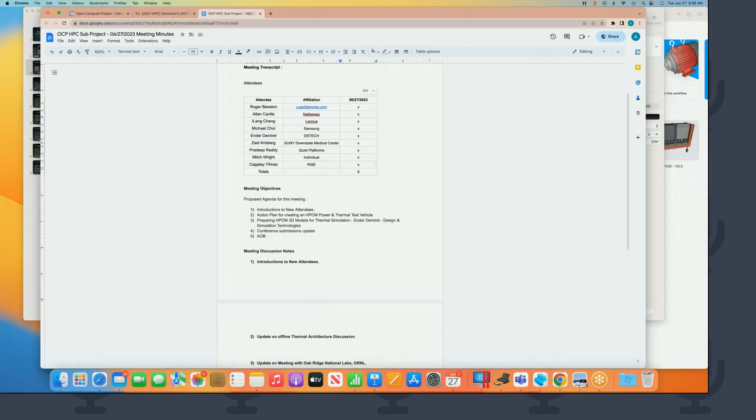So what I've got for today is, I believe we have a new attendee, so we'll have a quick introduction in a moment. Then I've started to put together a little bit of an action plan for actually creating an HPCM power and thermal test vehicle, but that will also help us go in the direction of creating a real HPCM module. So I'll get into the detail of that.

Then I've been working with Ender from DSTECH and Cagatay from RISE with regards to some thermal simulations. Ender's been starting that effort, and he has some things to talk through in terms of what he needs for the thermal model to get that going. So we'll cover that part of it, and then hopefully we can move the ball forward on his simulations.

And then with regards to the conference submissions, I have given an update. I have submitted something to the OCP main program, just to give people an update on what we're up to. I would also like to talk about a few other topics on a few other conferences that are coming up, and whether we should put something together for those.

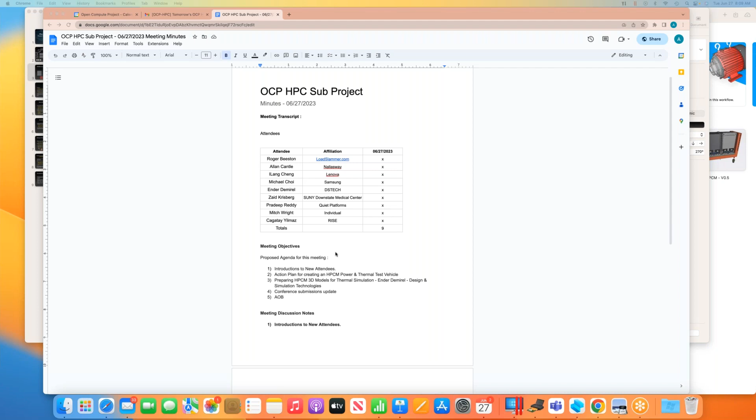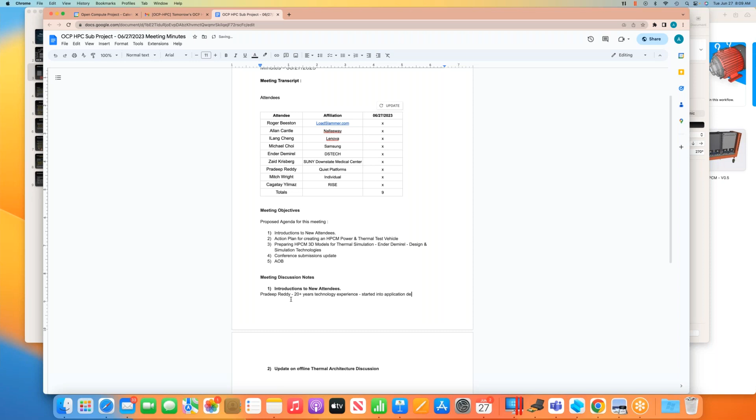Yeah, sure. Thanks, Allan. Hi, everyone. My name is Pradeep. I have around 20 plus years of technology experience, and I started into application development side, Java and open source. Later I worked with multi-cloud platforms and also on-premises infrastructure during my career. I've also worked as a startup entrepreneur two times, and I have my own company.

And also I'm an angel investor in a couple of startups and advisor mentor to them. And recently I was working with Quiet Platforms, part of American Eagle, as a director of cloud infra engineering. I'm based out of Bangalore, India. Thank you.

Thanks, and Alex, would you give us a quick introduction please? Sure, my name is Alex Lovell-Troy. I'm with Los Alamos National Laboratory. My background in HPC is through Cray and HPE, always on the software side, so HPC system management, those kinds of things. My interest is in figuring out what the future of system management looks like, given the changing form factors and things like that, so I'm particularly interested in that area.

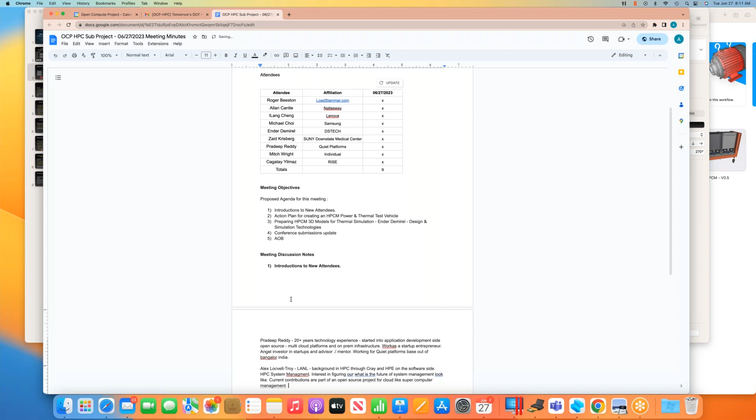Excellent, Alex, I didn't realize that detail about you. That's very good, that's a big aspect that we need to work on. I've had some past experience - in fact IBM have done a lot of donation into the industry on that area, and I think that's a big area where we could make a big difference here as well in a sort of collaborative way. So your help on that front would be superb.

I think that is the key, one of the key software areas. We're focused very heavily on the hardware, but the software side of the system management is going to be a rapidly changing area in my mind. I'm not sure if you're familiar with OCP's CMS, the composable memory system work group, but CXL fabric management is one of their big topics, and you can see that there's a lot of work to be done there of how do you enumerate the machine and discover all the different pieces of memory that are all over the place and bring that all together. So that's a big management challenge.

Yeah, totally. As we move to a more decentralized supercomputer, how do I know that the memory I'm talking to is the memory I want to be talking to - that's the problem, right, and not some sort of rogue piece of hardware, that's a big deal. Okay, no, absolutely, oh that's great.

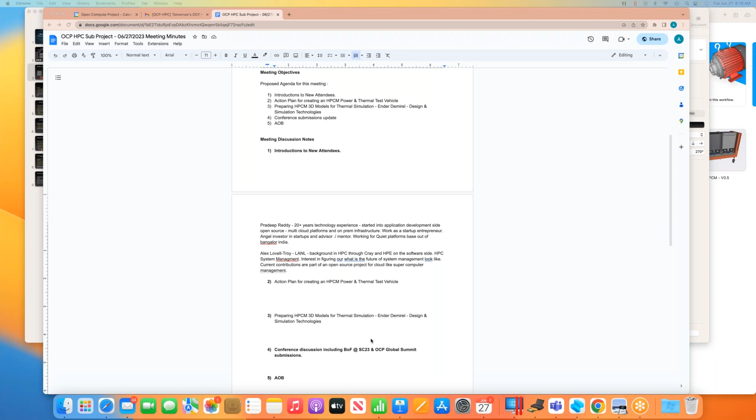Okay, so I've pulled together some slides. Let me just go to the beginning of these slides. Hopefully you can see this - can you? Yeah. So I've titled this 'Plan for OCP HPCM Power and Thermal Test Vehicle.'

What I wanted to start with here is we actually came up with the architecture of this Versal Premium module probably well over a year ago now. The nice thing about this particular FPGA or ACAP device is it does have a decent number of transceivers, 168 transceivers, so that we can fully connect, or not fully connect, but get a decent amount of connections into this first HPCM module.

We have been talking, for those of you that are aware, to XConn Tech about potentially doing a CXL switch version as well. Obviously the FPGA is a Swiss Army knife, and people are using it for a lot of CXL enablement, because that's one of the key areas where we see if we can get maybe some attention.

We've also been talking to Enfabrica about the potential - they've got an interesting switch chip that has both CXL IO on it. They see a shared memory model where you have the memory in the middle that can be shared locally with accelerators and processors, and also shared over an Ethernet fabric with a bit of a slingshot-like protocol. They've got their own proprietary low latency over Ethernet approach for shared memory. I'm hoping still to get them to present what they're doing, which would be helpful.

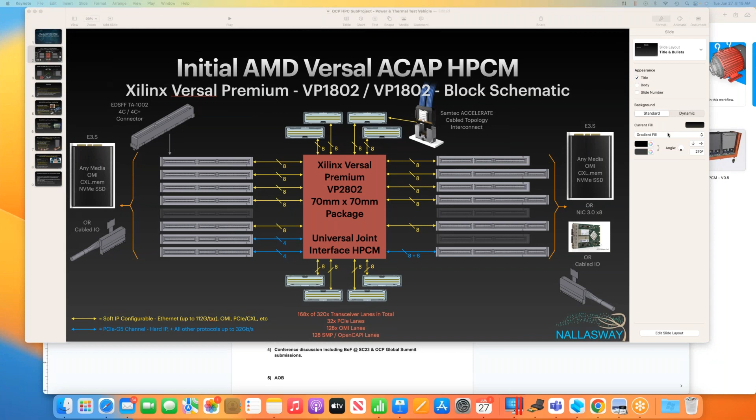Okay, but we've decided I think it's prudent for us to move forward with an FPGA based one first. There's a lot of things we can do with this, and it's being heavily used for a lot of the CXL developments, because you can do it in the soft IP.

So again, this is just showing the block diagram at the logical level. I wanted to add that I'll get these animations - we can plug all these different modules into these slots. Sorry, this is an old slide, I should have turned off the animation. But we can plug cables or modules into here, obviously.

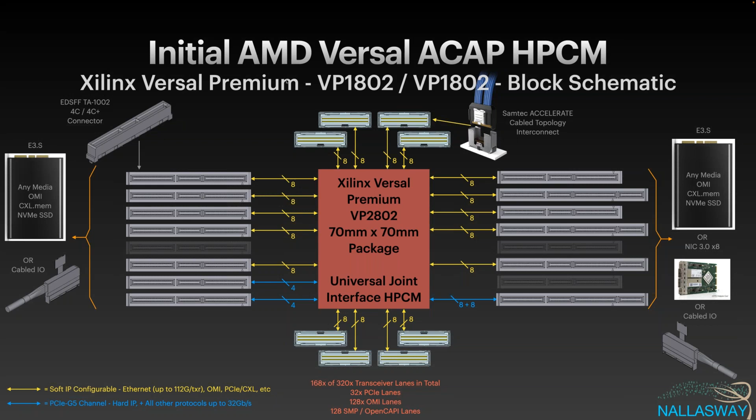The other piece of this, tying into Alex's introduction, is quite specific. In OCP we have this DCSCM, a secure control module that manages everything from a root of trust perspective. But we want standalone boot capability of all these devices, as we move towards this distributed computing world. We don't know how these things will be configured at power on, so they need to be able to self-boot and then be discoverable, so we need some level of BMC in the actual infrastructure.

As well as that, all of these modules we're supporting in this standard do have some level of sidebands. There's a big debate at the moment about whether CXL should have physical sidebands, out of band over the transceivers, or in band, or all three - that's a moving feast. But we know that NVMe modules, CXL.mem modules, and all of this, at the moment do have traditional sidebands. So we need to absolutely support this.

One of the nice things is Lattice has been doing a lot of work on the I2C and I3C front in terms of aggregating a lot of these sideband signals over a single wire aggregator. They also have something called LVDS tunneling protocol interface, LTPI, which they've freely donated to OCP as part of those efforts. That helps routability on the boards since there are lots of pins on each of these connectors. You can see these ICE40s in this picture - they're collecting a bunch of sidebands from two of the IOs and aggregating them down to a single wire to pass back to the BMC controller.

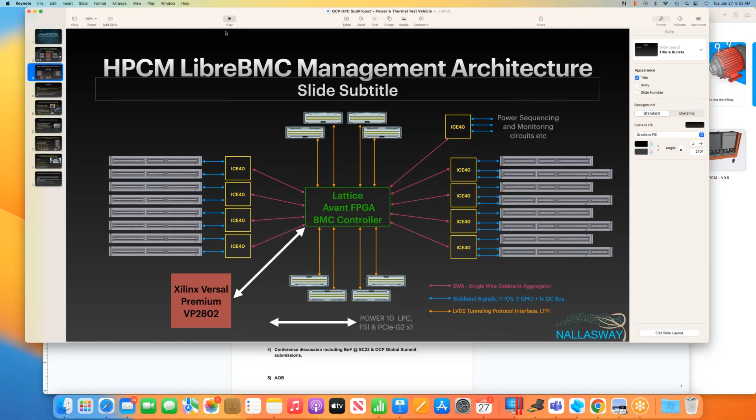Okay, yes, so we've got that. These are tiny devices as well, so they can be mapped - we've already got them mapped on the boards, but in the middle we need this BMC controller.

Now, one of the big efforts about making BMCs - they're a big area of potential hacking - and whilst we've got OpenBMC that has really gained tons of traction, on the controller side they've been dominated by a couple of smaller companies whose hardware IP is very proprietary. So there's been an effort called LibreBMC, which IBM were heavily involved in, along with a number of other companies, and OCP as well.

I believe LibreBMC is actually implemented on the DCSCM, the security module OCP have created. There are two variants, one with a Xilinx FPGA and one with a Lattice FPGA, I believe. The idea is you can implement fully open source software controllers, as well as all the low-level hardware features for various monitoring functions, and it can be fully visible and open source to everybody. So LibreBMC is that hardware effort.

So with Lattice's support, we're moving forward with a Lattice implementation on the module here. You can see the ICE40s, which are Lattice devices, doing this aggregation to bring all of this sideband IO in. We're using the LVDS tunneling potentially across some of these other interconnects for the topology interconnect if you want to carry them as a sideband. So that's basically the layout of the module at a very high level - that's the core of the logic. Obviously, the other piece of the module is the power.

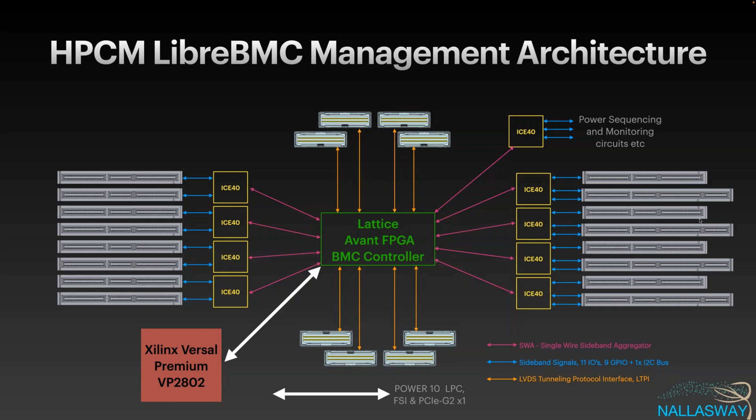So that's the module we're starting with. But we don't want to get too far ahead of our skis in that module design until we know we've got a good thermal and power infrastructure. That's been evolving quite rapidly, and OCP and these efforts have been driving the power industry quite nicely. We've made quite a good bit of progress in the last year compared to the last time we analyzed the power situation, when you want to deliver 1,000 watts plus.

So the objective of where I'd like us to go next is we want to prototype one of these HPCMs, but we've got this radical power and thermal infrastructure architecture. So we want to really build some prototypes and test this out, as well as simulate it.

So to do that, we'd need to build an HPCM load power test module. And we'd also need to build an E3.S load power test module so we can show that we can successfully cool these media modules as well. In that, we want to emulate the distributed power across the module because we've got some conductive cooling going on there that we need to analyze.

Once we've got those two modules, alongside that, we're going to need to design and build the HPCM, the main processor water cooling prototypes. I think we've got a couple of options for cooling the main HPCM, the kilowatt processor. And we have to design and build an E3.S conductive water cooling prototype as well. So then we need to test it all.

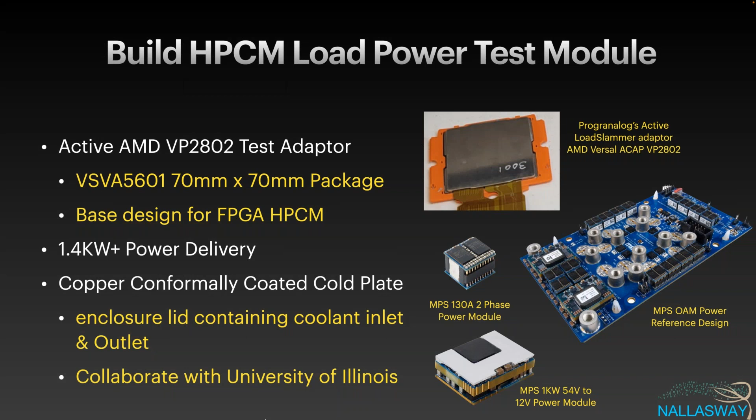Good question, let me just switch back over to the model if I can. Is the model going to be... I just want, for people that are new to the call, I wanted them to see this. This is going to take a bit of time to load, but essentially it's the same. So we need to build a prototype of the wall. We've got this wall infrastructure which provides the cooling. We were cooling in a vertical column of 16 HPCMs, and I showed a pumped infrastructure with control.

And what Greg is talking about is the potential to turn that into a thermosiphon approach instead. So at this point, Greg, I'd say no, we're just looking at an individual module. I'm thinking of maybe we implement a radiator type to cool a single module where we can pump the water around. Maybe we actually leverage some of the very low cost water cooling solutions from all these third-party companies for gaming PCs.

This prototyping level, it's all about making the blind mate connectors and making all of this work, but doing it from just from a get this up and running. Can we cool this? And if we can control the flow of the water, we can also do a little control loop on a single module.

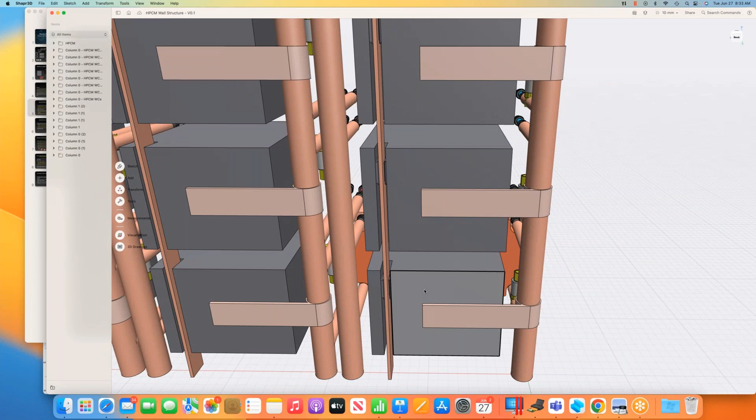So just for everybody here, this is a wall. All the new people, this wall is 16 modules high per column, and this is just showing a small section of a wall in the data center of eight modules. I built one for Frontier as well, where it was 50,000 modules. At the bottom, you can see one of our modules is plugged in, but this is the wall infrastructure here, and we had a single cooling loop for the 16 modules per column with a pump and a heat exchanger to go into the infrastructure cooling facility water. So that was what Greg was referring to there.

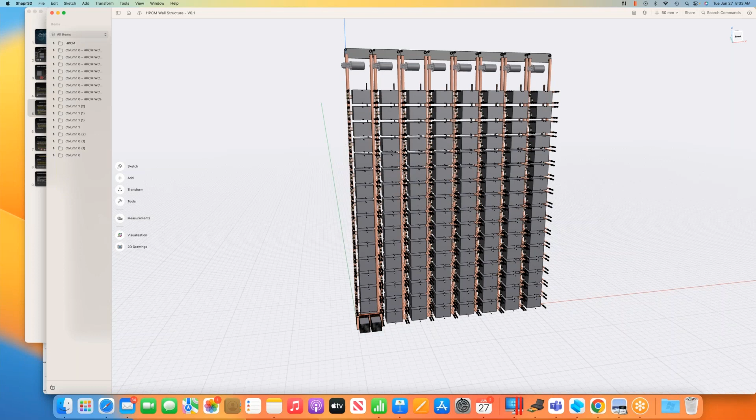So at the moment, this is how can we build the cooling here, and so I've said potentially we can do this conformally coated. We would actually do this University of Illinois innovation of conformally coating copper over an insulation layer and then running the water across that. So that could be one experiment.

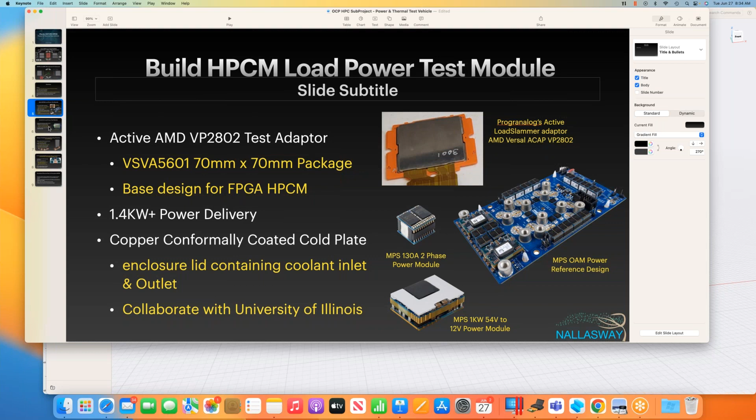I think I meant to put it on a different slide, so apologies. Let me just go back to this. With regards to the E3.S test module, I've just shown in the picture an example of a CXL version of these, but it's pretty typical. You have a controller chip that may burn most of the 25 or 40 watts of power. And so I said, for example, about 15 watts.

So we would put a power FET down there in a similar way to Roger's LoadSlammer implementation of a module. We'd do something similar for this, but we'd also distribute lighter load FETs to represent the way the power is spread across the module. So we could simulate a module thermally here as well, potentially. And that would then thermal conduct down, as I've shown in our previous models.

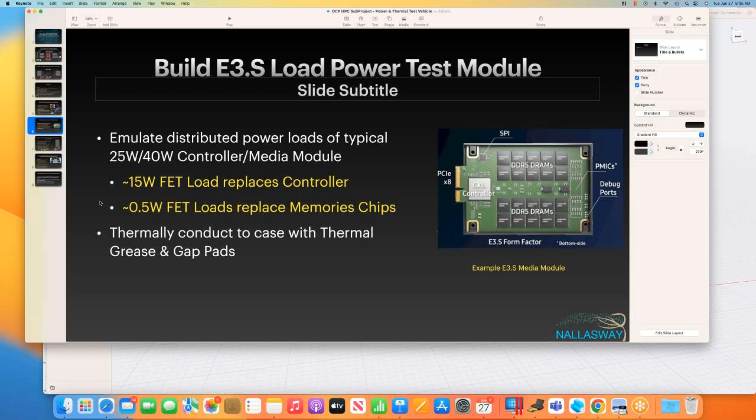So on the actual liquid cooling, we showed the module had 16 sites on the full design, and I thought that was going to be a little bit complicated for us for Ender to do the thermal model. So Ender, I'll send you this model over our shared team group later today. But basically, I've simplified it down to if we could build a test vehicle of one single slot, this is where we can experiment with our ability to cool this new idea I had of being able to conductively cool with these spring-loaded, like electrical type connectors, but for thermal transfer.

I think that's going to be a critical area. I think it might be difficult to accurately model that. So building this would be great. I don't think we have anyone on the call from Samtec today. Shout if you are there.

But I was hoping that maybe Samtec could help us make these little spring-loaded connector things for the thermal conduction. So we could build this. So this would have just a basic inlet and outlet there to use.

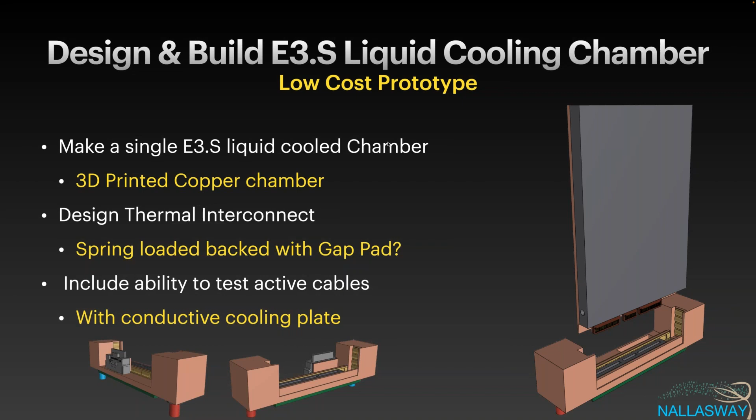So that's that. I just did a little bit more of a slide on this conformally coated. So I just showed that picture we've gone through before from the University of Illinois research, which is conformally coating a board, initially insulating it like the military did for hermetically sealing these boards, and then conformally coating this copper layer. They've got ongoing research there.

I said potentially our platform could be a good research platform for them. And then we would need to build a water chamber lid to go over this copper that would pour the water in and be watertight, and have inlets and outlets of the water. So I haven't done a 3D model of the test prototype there, but I was thinking that we could sort of feed that in as another sort of separate little test.

And I'm sort of torn between whether we do, at what point do we put the entire module together with all of the pieces and the water flowing through everything, versus the water flowing through these separate pieces. And to a certain extent, I think doing the separate pieces could help with Ender's thermal models, and I need to talk to Ender and Chate a bit more about that. But that could be a possible way forward.

Alan, I had a quick chat with our SMT line guys the other day, and they were saying that conformal coating is something they do on quite a regular basis because a lot of their work is military. The innovation here, as I understand it, is by using copper, it's a lot more thermally conductive.

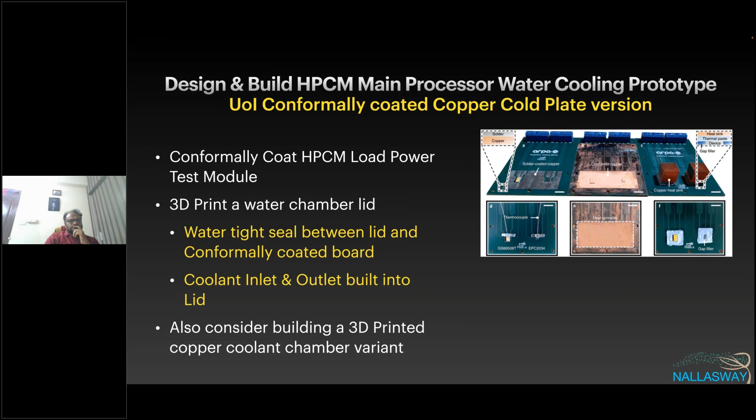But then you want to test it at full load, which arguably you couldn't do if you didn't have the conformal coating, unless you had some sort of more old-fashioned way of initially testing these. Maybe you couldn't test them to the full power requirement otherwise. So there's that system level test, and then there's this bathtub curve of early failures. And if you get a failure, can you recover it by rework? That's where you wouldn't be able to, that bathtub curve roll-off of recovering a faulty board.

That's a fair point. I think the argument goes, though, if you look at chiplets, if you look at what AMD are doing with their MI300 or NVIDIA with their devices, there's so many, they're talking about getting up to 3 kilowatts now. There's so many, you're never going to rework those. And to be honest with you, all of the value is in those chips. I guess, obviously, if you lose a power supply, you'd want to rework that. But if you lose that chip, then pretty much that's the whole value of the module in reality.

I think this is where graphene coating makes a lot of sense, because you've got to coat with something like PTFE or PET anyway. It bonds much better than the copper will, and I've still got massive issues about copper's corrosion. That, I think, is the main serviceability issue with this approach, is copper does corrode over time with contaminated water.

Yeah, I'll tell you what, we're getting into the weeds, and I don't want to. Yeah, you're right, I'll shut up now.

Really, this is trying to outline the plan of what we're doing. Not get into the detail, but this is what we want people to be working on.

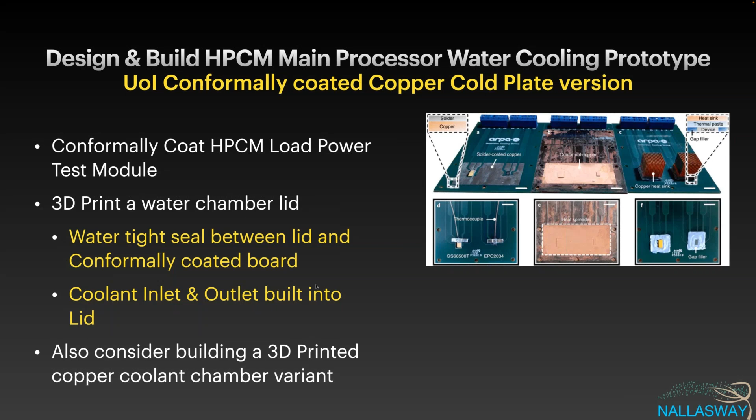But to that point, I really think we should do a 3D printed copper coolant version as well, because this is still research, and all the points just brought up are valid. I think this is what we're here to do, because we're trying to radically re-architect the way we build the data center. So these are things we need to resolve.

So basically, we could combine everything together, and maybe that's when we build the full cooling approach, where the water is flowing through everything. We need to be able to deliver the full 1.5 kilowatts. We need to get a power brick. We need to build an equivalent of the wall, maybe 1 HPCM or 4 HPCMs, which is the equivalent of the wall, a desktop version. And maybe we can integrate a little local heat exchanger, air coolant to air heat exchanger radiator, like one of these gaming radiators. So that was that.

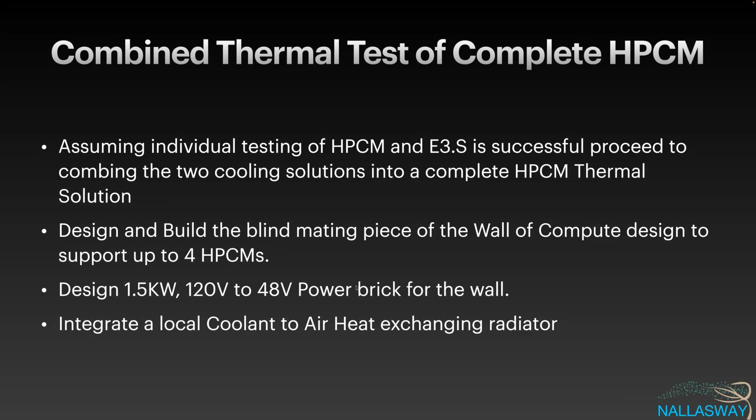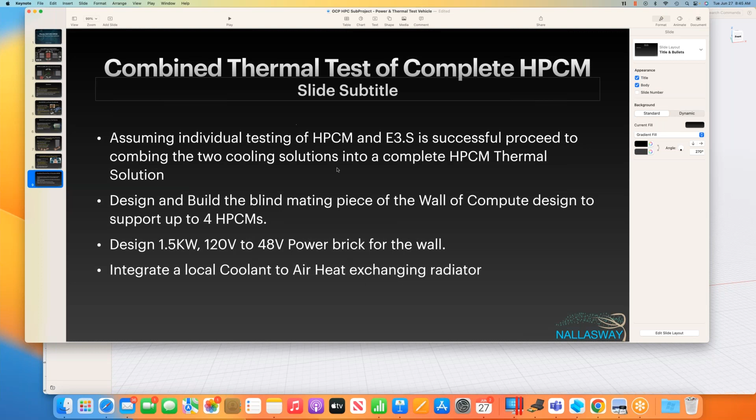I want to quickly hand over to Ender. He's trying to build a model, looking at what he needs, and what we can delete from the model to make his simulations easier. As you can see, I've done a little bit of work here, maybe for the E3.S. Would you like to share your screen, Ender? Okay Alan, let me share my screen.

As Alan pointed out, we are focusing on development of thermal models of the HPCM, a liquid-cooled thermal model, by means of numerical simulations. We have to discuss which components should be considered or included in the thermal model, because a multi-region computational model will be used, where governing equations will be solved at each region, such as air, water, and solid. So in order to reduce the computational mesh and time, we have to discuss which components will be included or excluded, depending on the thermal perspective.

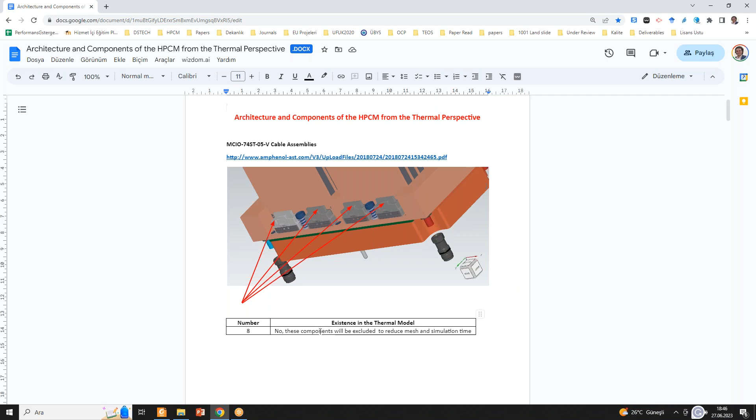We opened the three-dimensional geometry in CAD viewers. So the first component is the cable assemblies here. There are 8 cable assemblies on this model. So the question is, will these components be considered or not?

Well, I think not. We can take those out, except maybe one of them, to do an active simulation. I don't think there's going to be a problem cooling those compared to cooling the E3 modules. So take them out for this first order. I wouldn't worry about it, Ender.

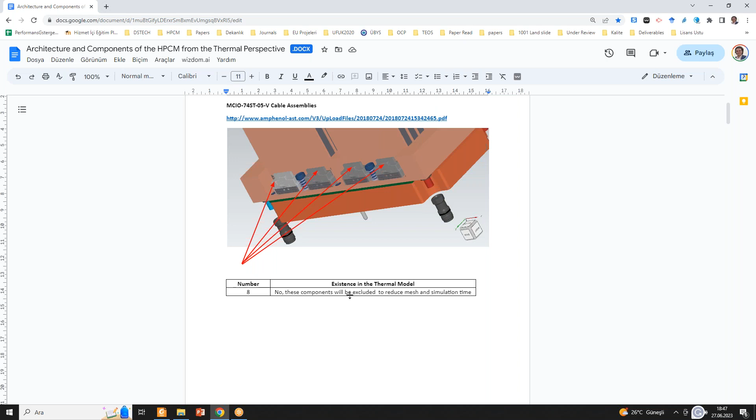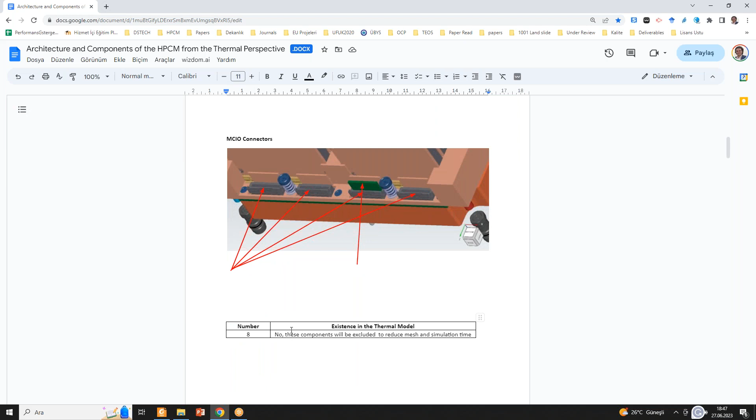Then the second component is the MCIO connectors here, where the MCIO components will be connected. So we are planning to exclude these components in the thermal model, if that's okay.

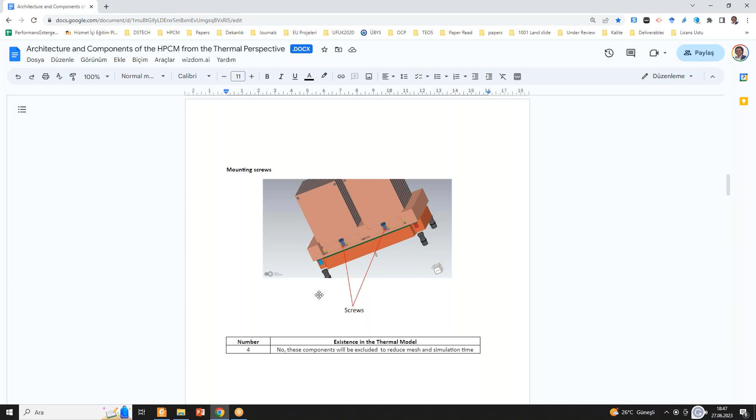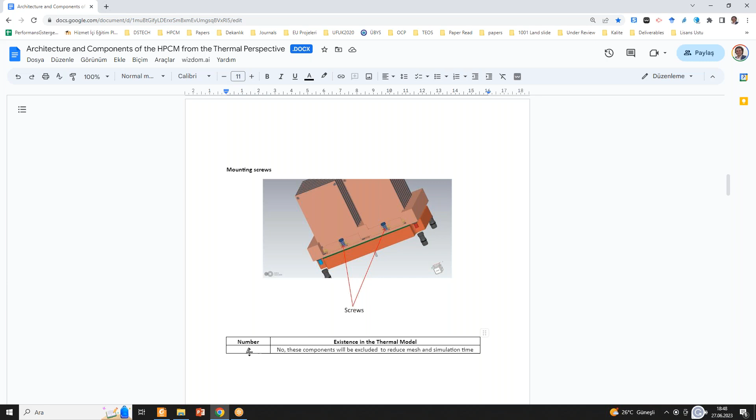That makes sense. Okay, the other component is the mounting screw. There are some radial parts on this component. So if we want to include this component in the thermal model, we have to create a computational mesh around it, which would significantly increase the computational mesh and time. So these components can be excluded from my thermal perspective. Yeah.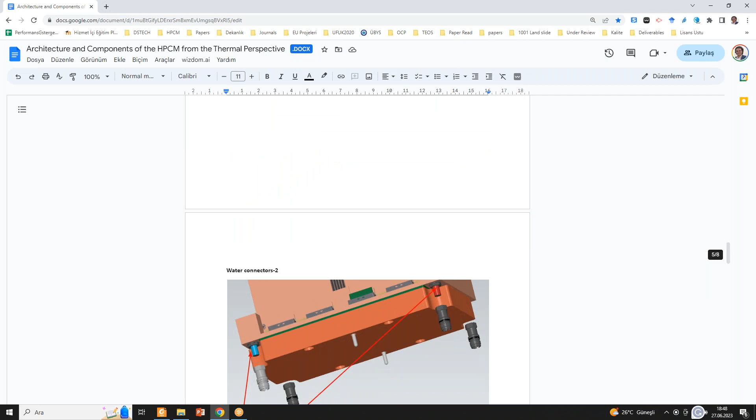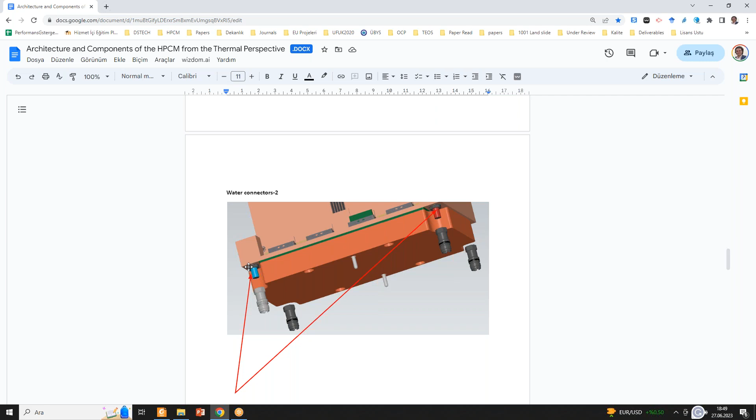Okay, the water connectors don't exist in the thermal models, so we will create thermal patches on the surfaces. Our plan is to remove these components from the three-dimensional geometry of the HPCM, so inlet and outlets of the water to the HPCM can be created as surfaces. So our plan is to remove these water connectors and create surfaces or patches at the bottom of the HPCM, where water enters and leaves the domain from the inlet and outlet respectively.

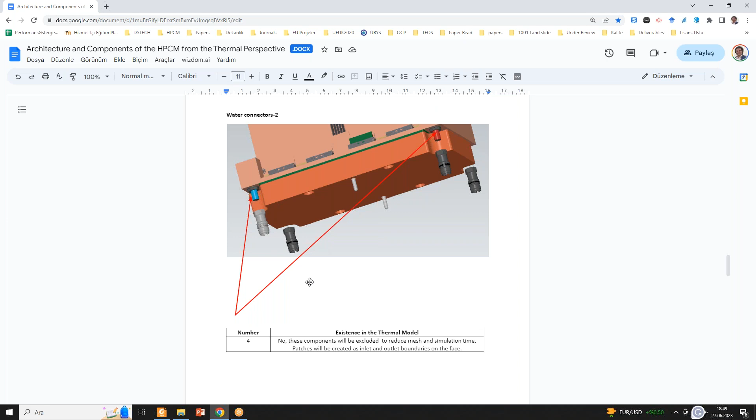So as long as you're representing the diameter of the connector as it goes in, in terms of the flow, that'll be fine I guess. You don't need the complexity of that for sure. Okay, as I said, our aim is to simplify the geometry at the first step. Maybe we can include these components in the next versions of the thermal models in order to see some final results.

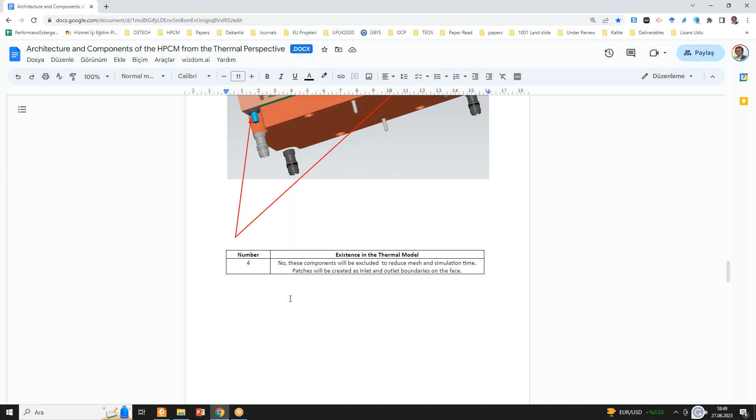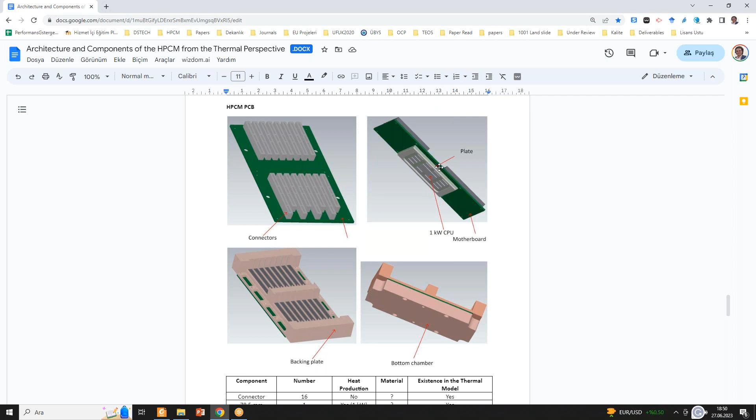Yeah. The components at the bottom of the HPCM can be classified as connectors, the 1 kilowatt CPU beneath the motherboard, and there's a plate between the CPU and the motherboard here. Maybe I can zoom in to see better.

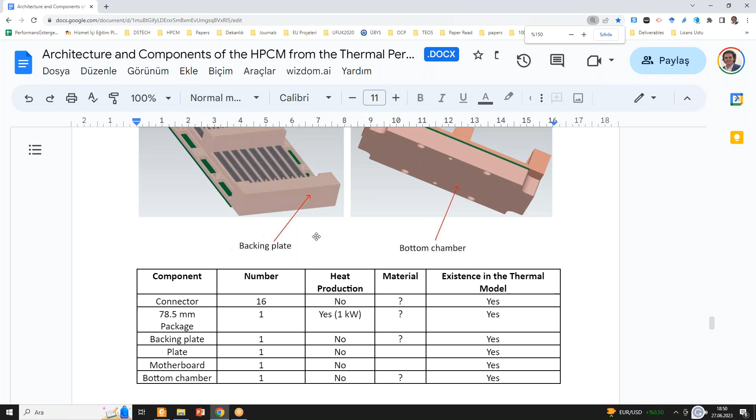Then bottom chamber and backing plates will exist in the thermal model. So the questions are related to the material properties of these components in order to accurately simulate the heat conduction over these components. I think we need to specify the material properties in this document.

Yeah, and the one thing I'd say here is obviously this is going to be the full model. So when we get to the full model, I think like this back assembly, the backing plate, that new model of a single slot that I've created with water in and water out of a single slot, I think that would be a good first step for us to model, and then we can roll it into a complete unit like this of 16.

Now my head was in the area that this plate here potentially would be copper, obviously all hollowed out for the water flow to the appropriate water flowing. So my head was that the backing plate there was copper.

In terms of, obviously the motherboard is your standard PCB materials. I'm sure it'll be a high-speed one rather than your FR4. There's tons of high-speed ones now, I lose track of them. Megtron 6 or Megtron 7 is probably one to assume there. But again, the motherboards are quite complex because they have lots of copper in them as well. So we normally do a simplified model that I've done in the past of the conduction properties of the motherboard.

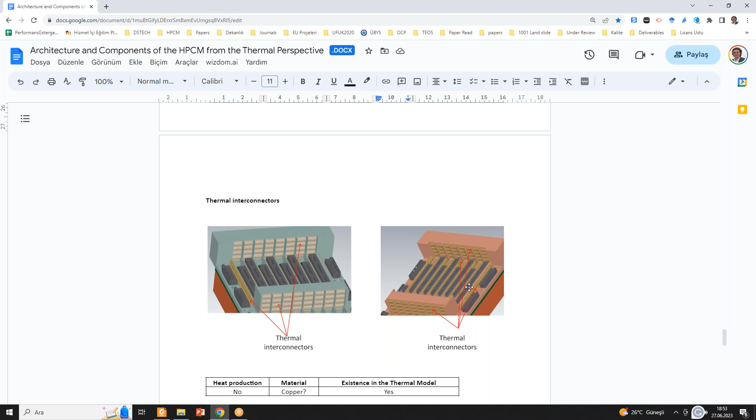Okay, we can add this information to the document later maybe. There are thermal interconnectors at the lateral and bottom sides of the HPCM in order to increase the heat transfer between components, in order to benefit from the thermal conductivity. So we can specify this material as copper here. And I'm not sure that we can.

I think that's where we need, it's a shame Samtec aren't on to take the action, but I think that's where, I'm not sure how the connectors are gold plated or something, and I believe they're not copper because the copper won't have the springiness that you need to return back, if I understand correctly. So we need to find out what is that metal that they use.

We need to make a decision on if and how we coat that, and what plate it. And also I'm thinking if we could put some sort of gap pad material behind it, as it gets mounted there, as a module gets plugged in and squeezes those springs, the gap pad sort of gives you a better thermal conduction to the overall cold plate.

So this is where I think it's going to be a bit tough for us to model this. This is my biggest concern of accurately modeling it first time, and why I want to build an individual one to actually calibrate that as well. But yeah, there's complexities, there's a bit of gap pad and what is that material.

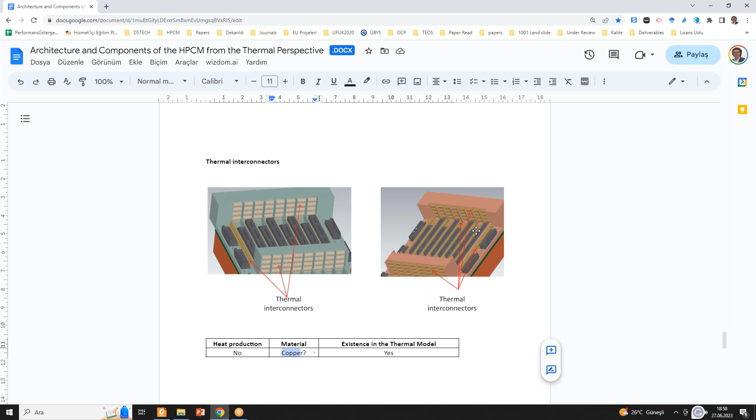Yeah, there is a beauty in the simplicity of just a thermally conductive material. Sorry, I'll shut up now. I did have a wedge lock approach before, but then these walls were really tall. Okay, we're a bit short on time, so let's put copper as the answer to that, but we need to find out.

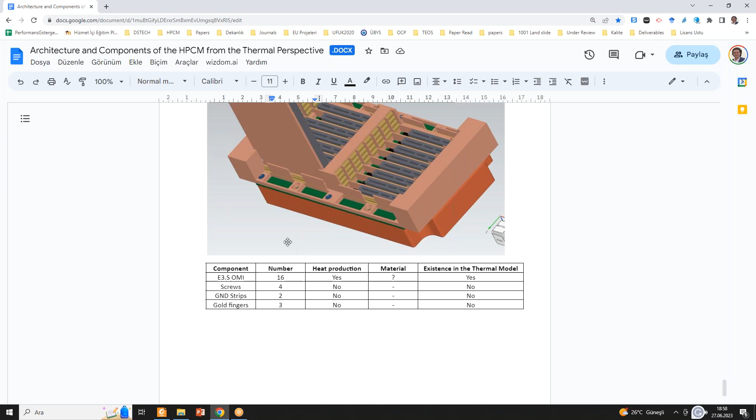And the last one is the E3.S OMI memories. So there are 16 on this module. Heat production is available, so we need to specify the material and the total power generated by this module. I think we want the 25 watt, which is a single width version, and the 40 watt - I'd like to be able to cool the 40 watt in a single width format.

It's a sort of goal that we get that extra power density. As I explained in my slides, it will be good for us to get the power sources distributed across the module, with the controller at the bottom nearest where the cooling is going to be - most of the wattage of the module, of the order of 15 watts, and then the other 10 watts in a 25 watt one would be in the media. That's sort of my rough idea, and you'd spread that out.

So your thermal model would need to be representative of where the power sources were, and then you'd have a unibody case that would probably be aluminum, where again you and I can maybe work on building a little thermal model for the module, and then the lid. I've sort of shown the lid as copper there. I don't know if it needs to be copper, but that's what I've got at the moment.

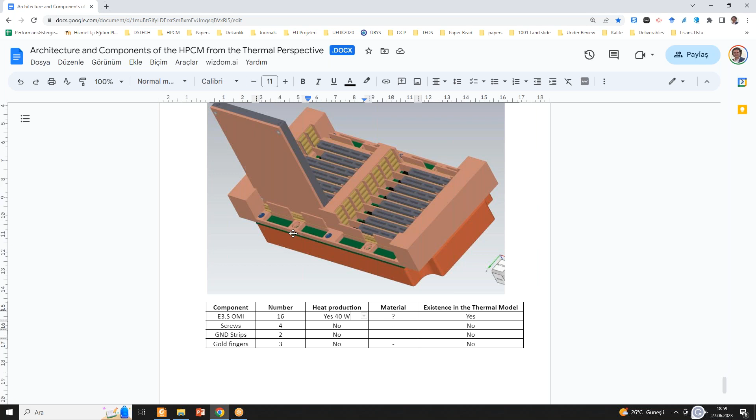It could be aluminum, maybe. It depends how the thermal simulations go, I guess - that will guide us. Okay, that's all from my document here, so I'm stopping the screen.

All right, well, it's good to be getting started on that. And that was very good timing - we're at the top of the hour.

I did want to say about conferences. So I've put something in for OCP, for the OCP Global Summit, to give everybody an update. I think Ender is putting something in for the Future Technologies Symposium based on what we're doing here. I was going to put some more in as well, another one maybe for Future Technologies. I'm going to the Composable Memory System meeting tomorrow, and I'm going to be presenting on what we're doing here from a perspective of the CXL enablement. So those guys are working on the management side, the fabric management of CXL, and I'm presenting this, and the main guy from Lattice is coming along as well, so he'll be able to talk to the BMC side of things there.

And for supercomputing, I'm thinking of applying for a BOF, and when you have a BOF, it would be good to have a panel of people bringing something to the table of what they believe, why they believe in this, and what they're maybe doing to help us make this become a reality. The last BOF I did, I had Lawrence Livermore Labs.